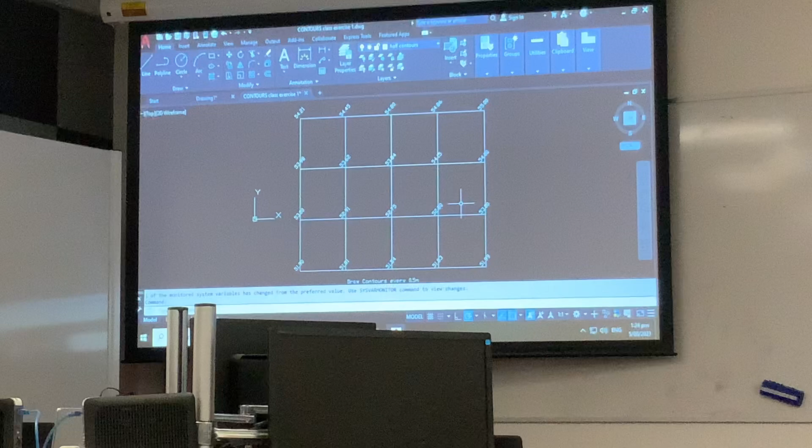With this exercise that's following on from my lecture on Wednesday, I'd like you to do contours - what does it say down the bottom - every half a metre. Okay, so looking at it...

Can anyone see a good place to start? There's a 53, and there's also a 54 over there as well.

Okay, so obviously you haven't been talking to the previous class, because the previous class was offered a half a mark for the best place to start from.

And obviously you guys have forgotten everything from last semester, because the golden rule of AutoCAD before you start is to make a layer. Okay, so we always start by making a layer. So let's make a layer up.

Yeah, there were 2 or 3 students in the last class who weren't very happy with my way around that one. So I'm going to make a layer up and call it contours. Don't worry, I've got a few more of those tricks up my sleeve - wait till next week.

So I'm going to get you started, and guess what, I'm going to make you do a bit of work after that. So it's probably a good idea to just put this on here, take off all these settings, whatever they're on at the moment, and just put nearest on. That way it doesn't bounce to different parts.

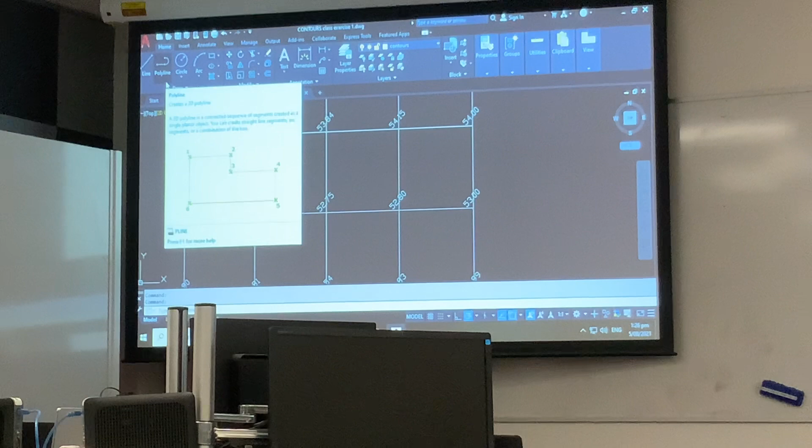Now remember, this is eyeballing - guesstimate, I call it. So it's best to do a P-line, and basically 53 is the next best.

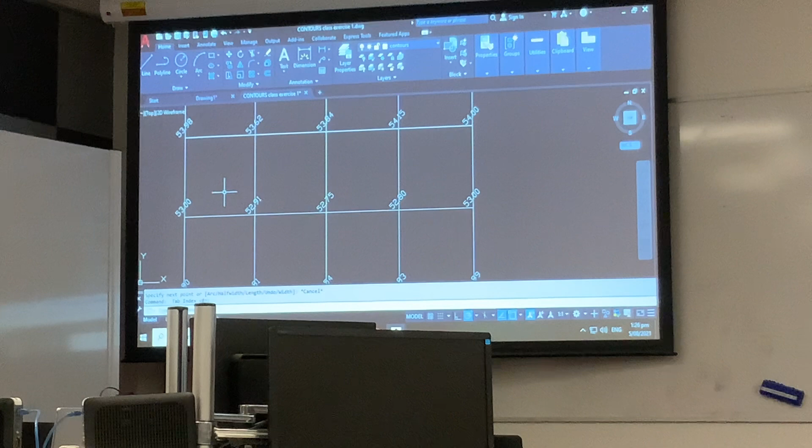Now see that stuff that's following me around? I call that bubble and squeak because I hate it - it follows you around all the time. I don't know what Ingrid told you to do, but I always change my snap settings down here to dynamic input and get rid of that lot. I see so many students that have that bubble and squeak going on, and they're trying to ask me a question, and these numbers are popping up all over the place, and I'm like, whoa, stop, get rid of that.

Okay, so a little tip there. P-line, shortcut PL, enter, or if you've got AutoCAD Classic already set, you can click on it as well. Notice the standard setting does have a polyline up in the top corner, beg your pardon. So I'm going to click there.

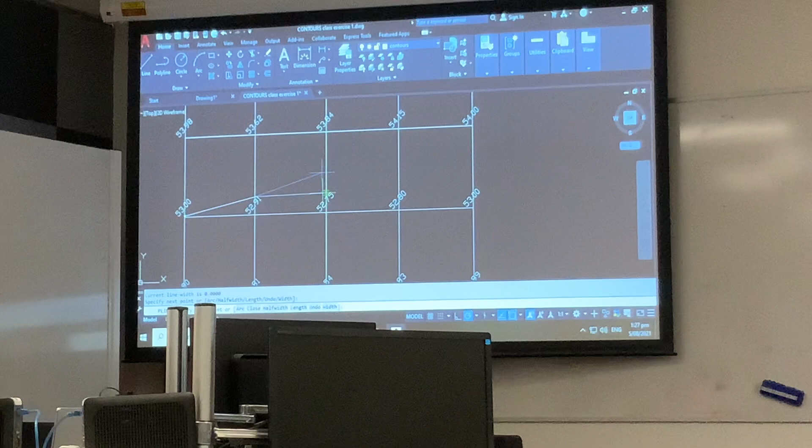I'm now going to estimate between here and here. 53 is real close to 52.91, and it's a long way from 53.62, so it's probably somewhere around about there. Looking between these two, well it's definitely not going to be between these two or those two, so it's probably going to be somewhere around about there - a bit closer to the 80. Notice that one's 54, not 53, so it's probably closer down here, and then back to the 53 over there.

All right, so that was fairly painless. What I'd like you to do is do the guesstimate yourself. I'll give you 3 minutes, 4 minutes - we'll make it 5 minutes, and then I'll draw it in 3 seconds. How's that, good deal? Have a go.

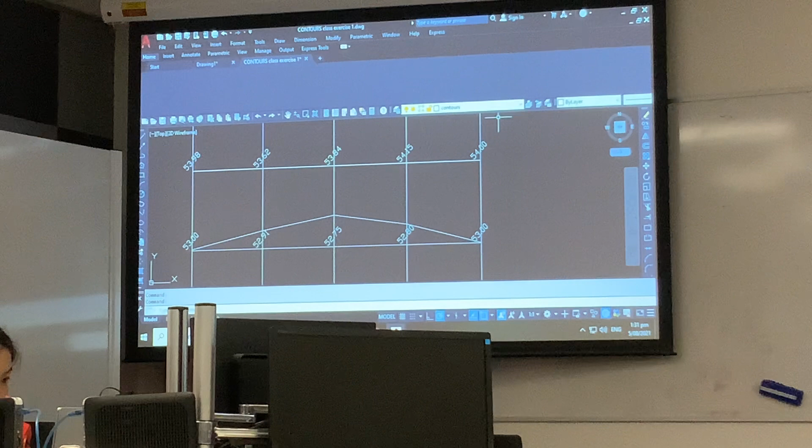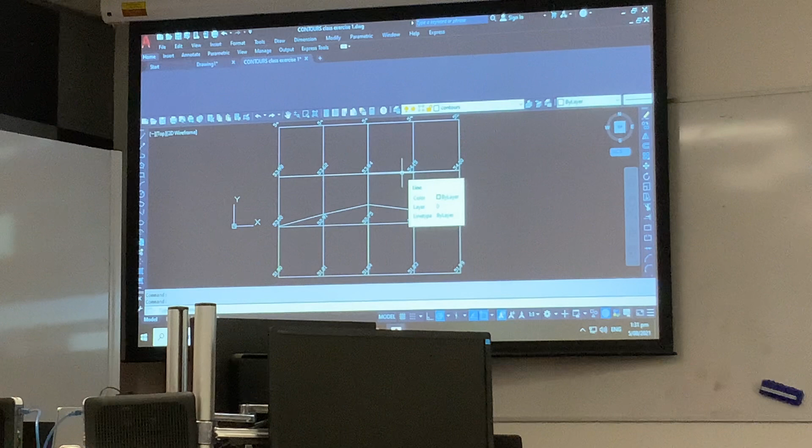So you'd start at 54, but it's a little bit different - you're going to have to guesstimate it coming through here somewhere. Then it goes back up here somewhere, and then it's going to go up here, and then there, and then up here. So the 54 line does a little bit of a strange thing like that.

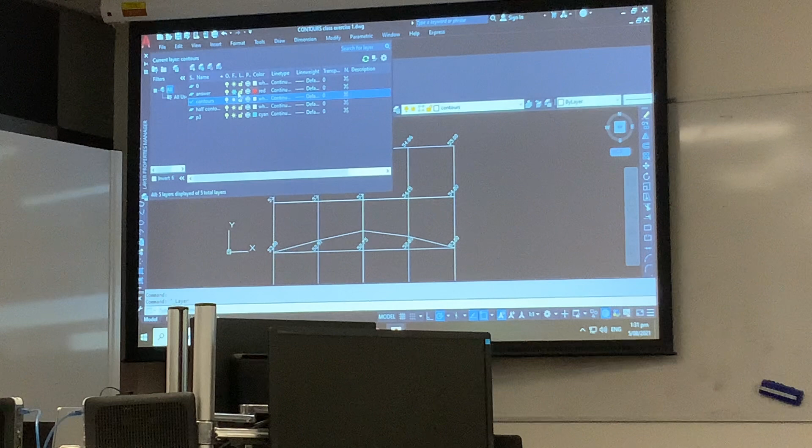But I did say that I would draw this up in 3 seconds, didn't I? Which was a bit of a smart thing to say, but what I forgot to tell you was I've already pre-drawn it. So when we go to our layer management and turn on the answer, you'll find it is there, okay? And let's have a look at what I've done - I'm not quite right, but it was pretty good for a guesstimate, all right?

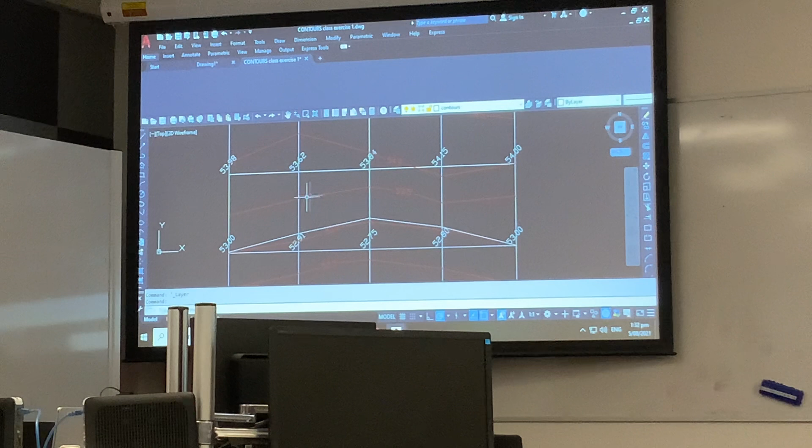So what I did was I drew the 53, then the 54, and then I put the 53.5 in the middle of the two. So that's the last of our guesstimate. You can see that you can still do a pretty good job of your contours, guesstimating, right?

And for a lot of site engineers, that's perfect. That's all they really want to do, to give them an idea of what they're trying to build. Let's face it, nothing in a civil engineering site is going to be 100% perfect. There's always a little bit of tolerance on what you're doing.

Structural's different. If structural engineering's your passion, you know, let's take steel beams meeting steel columns, and you're bolting a plate on somewhere, and you've got a hole that big to put the bolts through. It's got to match. It's no use being 10 mils out because you're not going to get the bolt through, are you? So structural's very, very different. We do that a lot more precisely.

And I'll be giving you some details on structural bolting and that sort of thing, in terms of working out the holes for things, etc. But in civil it's a little bit different.

So as a civil site engineer, you're going to have to do a lot of this type of stuff manually. It's doubtful if you'll have 12D, and it's even more doubtful if you'll have a copy of AutoCAD. You're more likely going to get a PDF file sent to site, which you'll print on a funny old printer that's there. You usually got the worst printer on the site, because they don't want it getting all dusty and dirty.

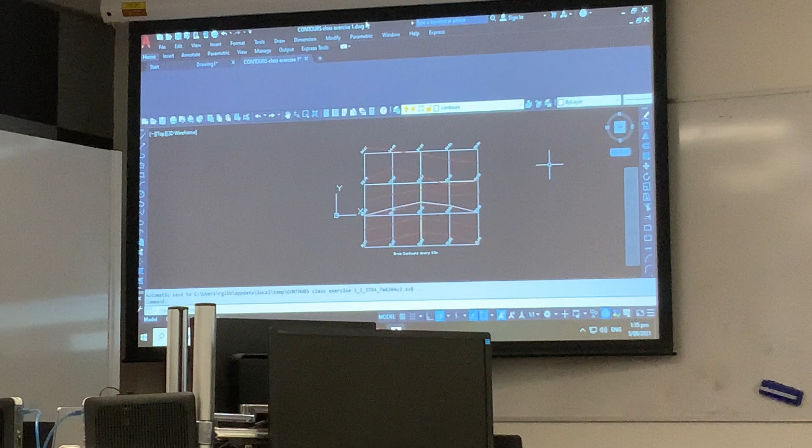So what I'm going to do is I'm going to do a typical design here, a fairly easy one, and then I'm going to throw you loose on an AutoCAD file with some contours on it and a platform, and give you a chance to have a go at doing it yourself.

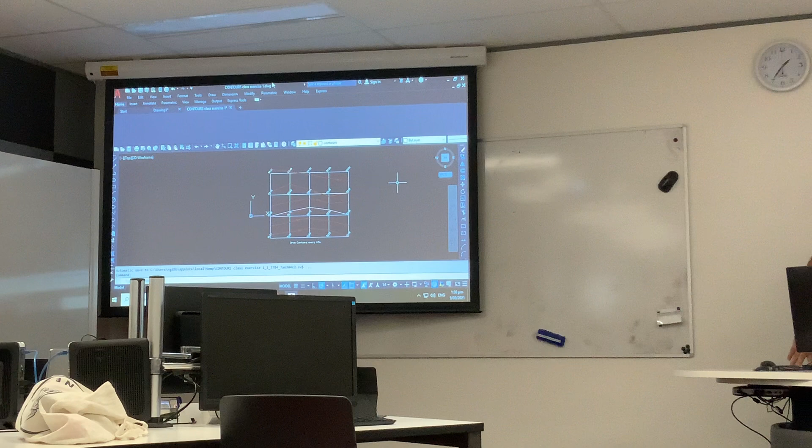But of course, like everything else in engineering, I should have been a baseball player because I love throwing curveballs. Okay, we're going to throw a curveball at you as well. Then I will show you the answer, both in AutoCAD format as well as a 3D file that I've made up to try and give you a bit of an idea of what's going on, so you can spin it around and have a look at it, not just in plan view.

You're going to have to do platform design for your assignment. So I'm looking at the camera right now. This is 6 or 7 marks that I am not going to give you any help with, and neither will the past students. But because this is being filmed, you'll get a very good idea of the type of things that need to be on the drawing.

All right? It's assignment 2, so a lot of you go, oh, not worried about that, that's 5 or 6 weeks away. It will come pretty quickly, and you'll be racing back to have a look at that movie file to see what I've put on the board, okay?

So it's not like I'm not giving you the answer, it's just that when students email me saying, shall I put the word cut on the cut area, I'll say, I'm sorry, I'm not giving you any help with that side of it. But you'll notice tonight I will put the word cut in the cut area, all right?

So, Douglas, you should really be putting this file somewhere where you can charge for people to go on the site.

Because most of the students I'm noticing are not note takers anymore. COVID's killed your note taking ability. You sit there and you go, oh, I'll watch the video later on. Once again, the video's on an angle, it may be a little bit difficult to see the board, so you will have to listen to what I'm saying. I'm loath to do this, but I'm going to go and turn that off.

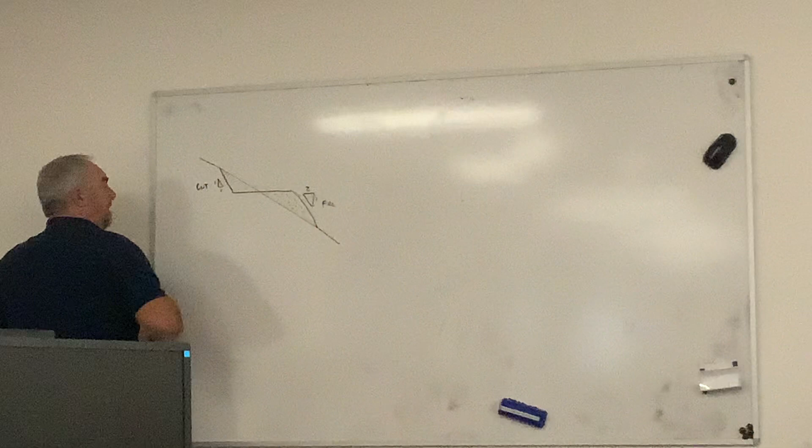Now obviously, to save money and time, you're not going to make the cut 2 to 1, or else you'll end up cutting more of the bank, so you keep that cut to the minimum. Therefore it's very difficult to balance cut and fill in Auckland.

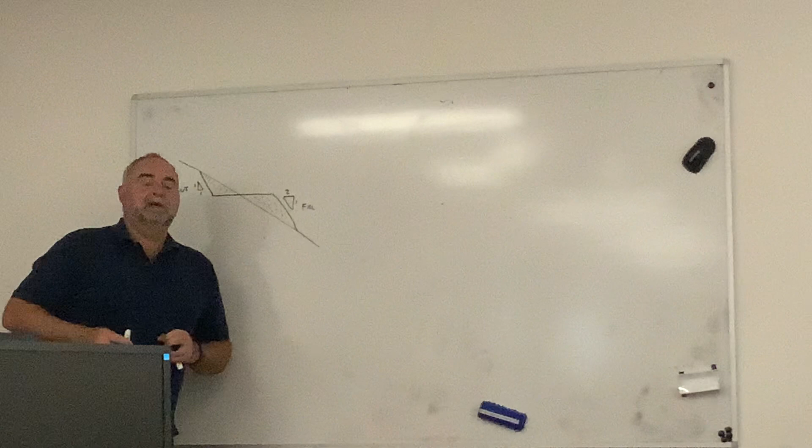Generally, you end up with more fill than cut, which unfortunately means bringing in, for most sites, clean engineering fill from a quarry. There are only certain places you can get it around Auckland, and we all know what the traffic's like - send a truck away at 1 o'clock to get some clean fill, and they come back at 5.

The building industry, everybody's got the same issue, so the truck driver's not going to lose money, so he puts his costs up. Everything costs money. The best design is when cut equals fill, then you're just manoeuvring it around on the side, or you find somewhere on the site to put it.

Generally, environmental engineers don't get too upset if the material you're digging out of the site is kept on the site, because you're not bringing anything in from another part. Where they get upset is when you bring fill that's not clean engineering fill, and it's come from some site down the road where no one knows if it's full of garbage, trash, contaminated stuff, whatever. That's not good - it can also flow down into the streams and water.

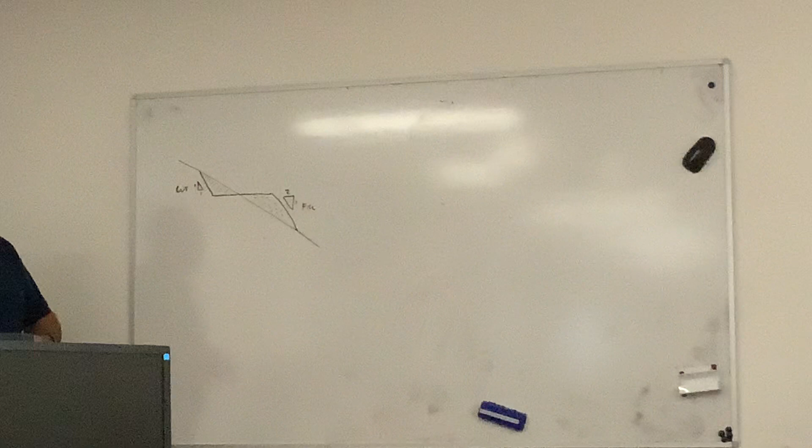These numbers here are determined by the geotechnical engineer, which I might have mentioned in the first lecture. Normally not a designer's best friend, because they tend to change these numbers, and even a little change means whatever you've worked out is going to be completely different again.

It's worse on a road - a platform's kind of limited, but on a road you might be going over 10 kilometres, and if they change these numbers on your batter slopes, your cut and fill balance just goes haywire. So you have to raise or lower the road to try and balance it, which messes up your vertical curves. You can get away with putting a different horizontal curve to make the road longer in an area of cut or fill to balance it out.

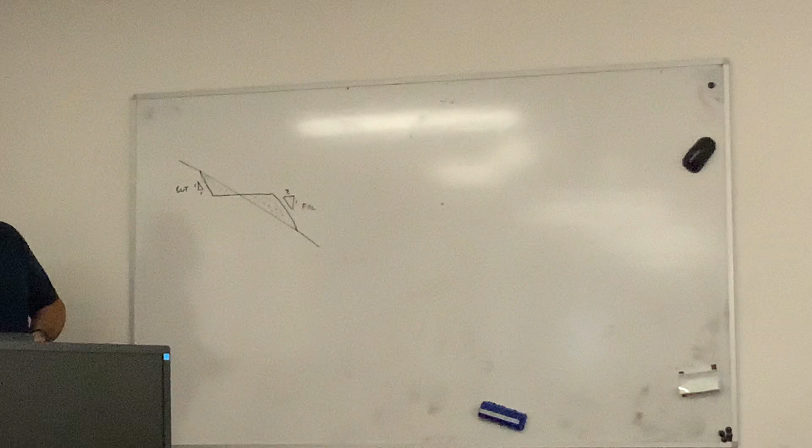There are ways around it, but the last thing you want is changing your design a day before it goes out the door - you might have 50 sheets of sections and 10 sheets of long sections, and you've got to redo them all just because this guy's changed the slope to 1.5 to 1 or 2.5 to 1 or something like that.

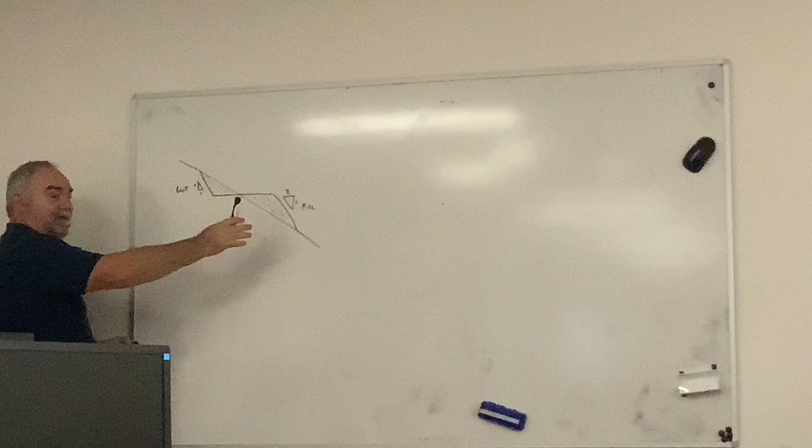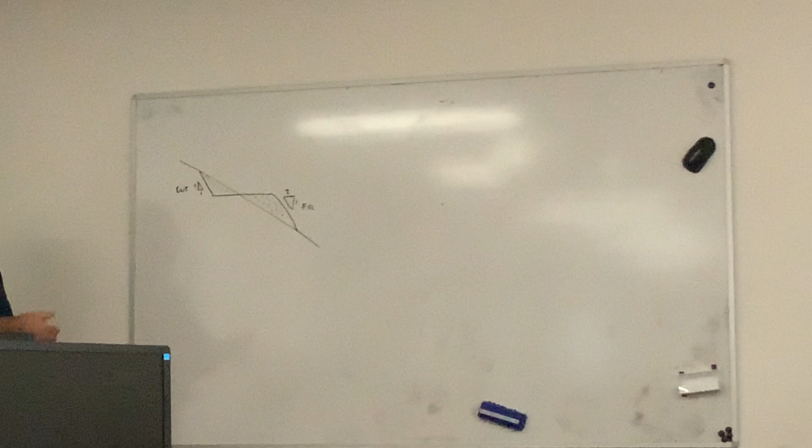So I've tried over the times to buddy up to them and say, hey, a week before, is that final? Oh yeah, it should be all right. Then the day before, oh I'm doing this because most of them have got a worse beard than me, covered in clay and mud because that's what they do, they drill holes and look at soil all day. They'll just come up the day before and say, sorry, I've changed my mind, and usually sorry doesn't come into it, it'll be 2.5 to 1.

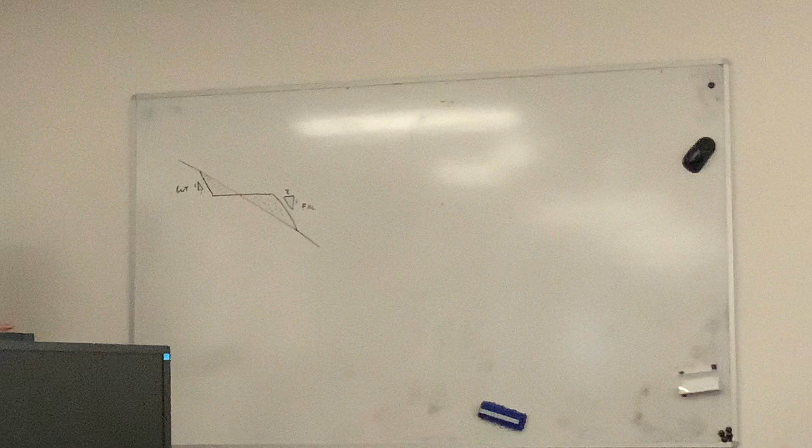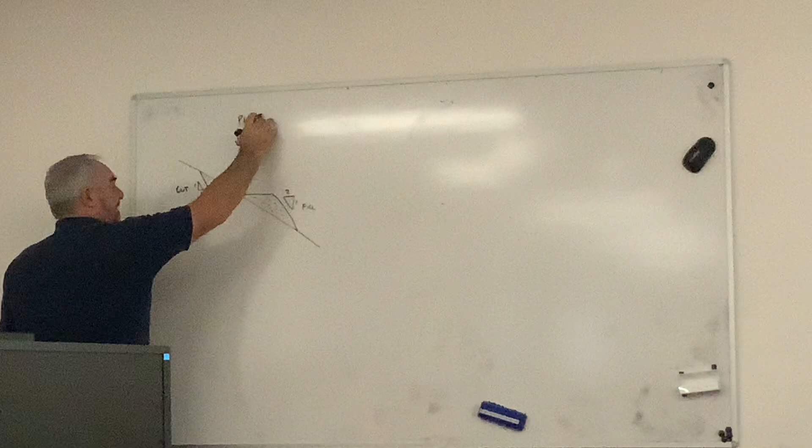But getting back to what you're doing, this here is design, and this is what we have to do, show in plan view looking down on it. So looking down on our platform here, we have the platform shape, which is easy to do, that's not a problem.

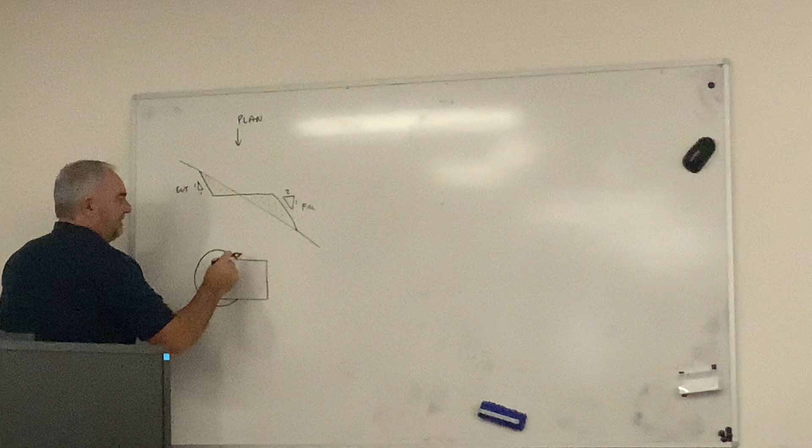Where this meets here and on the other side will be the area of cut, and you'll find that the area of fill, because this is normally drawn like this, ends up being quite a bit bigger, so the area of fill can end up being as big as that. And you're starting to see what I mean by butterfly wings?

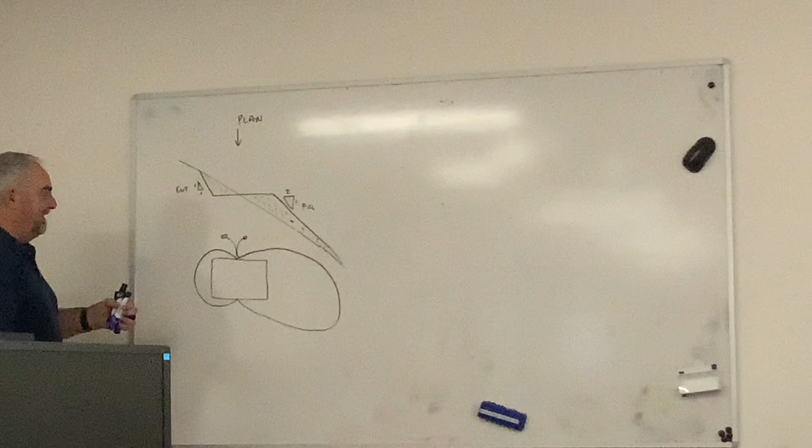All right, this one's flying into the sun, so it's like this. Yeah, it's a bit weird because I've taught 2,500 students over the years, and they all refer to that as butterfly wings, which is totally not an engineering term.

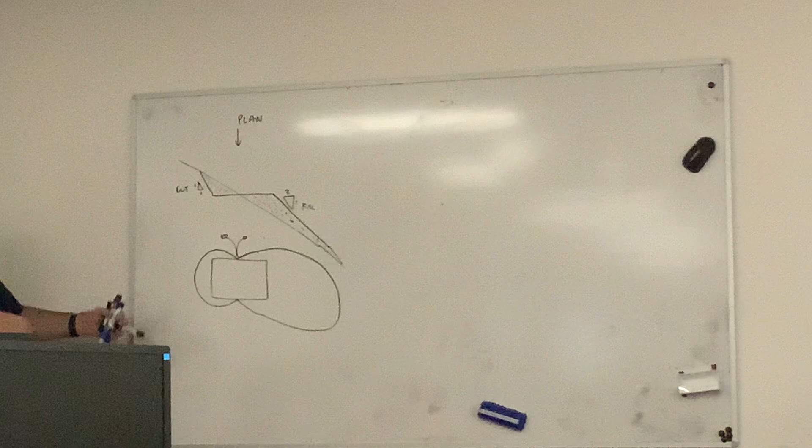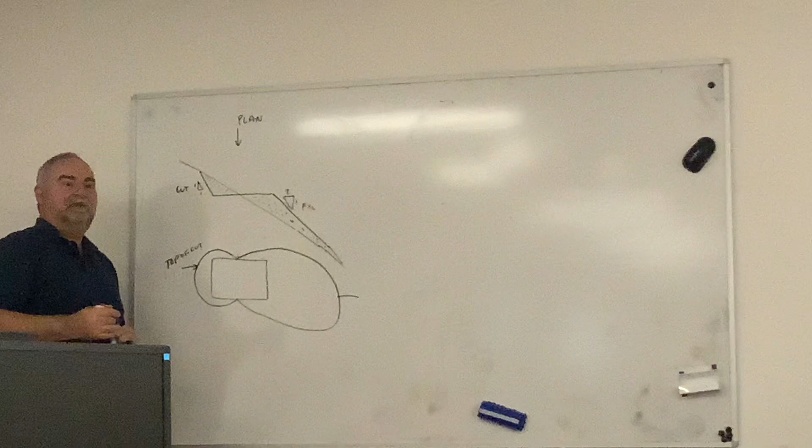They are actually called top of cut, and anyone know what that one's called? Bottom of the fill. Who said that first? Congratulations, you're not getting half a mark. They're called the toe of the fill.

It's all right, you get a chance in about week 8, sequel. Roger Gibb, horrible lecturer, does not give out half marks very easily. Yeah, the toe of the fill.

Now, most of you have done 4 subjects here at Unitec in semester 1, 1 or 2 have done a few more. If you've done the likes of Geology 1, where there's a slip in geology, they refer to the bottom of the slip as the toe of the slip. So in engineering, we refer to anything at the bottom as the toe - you'll always remember that, won't you? It's one of my questions in the test. You'll be the only one that gets that right.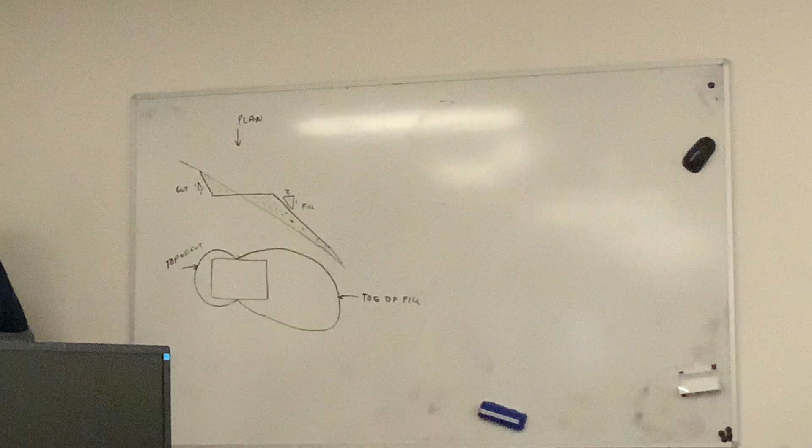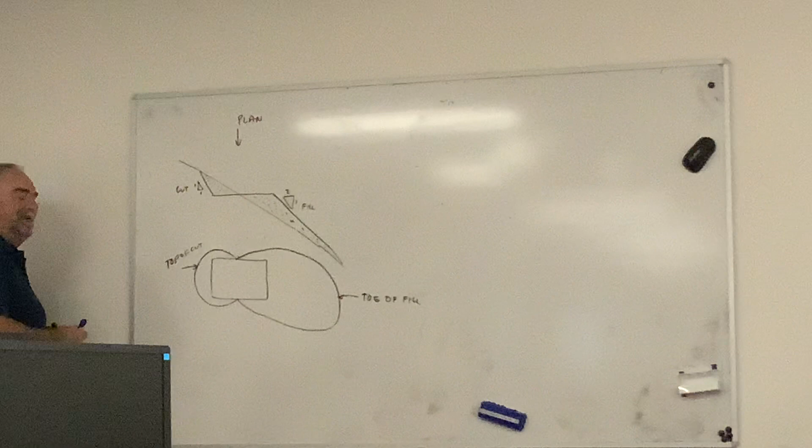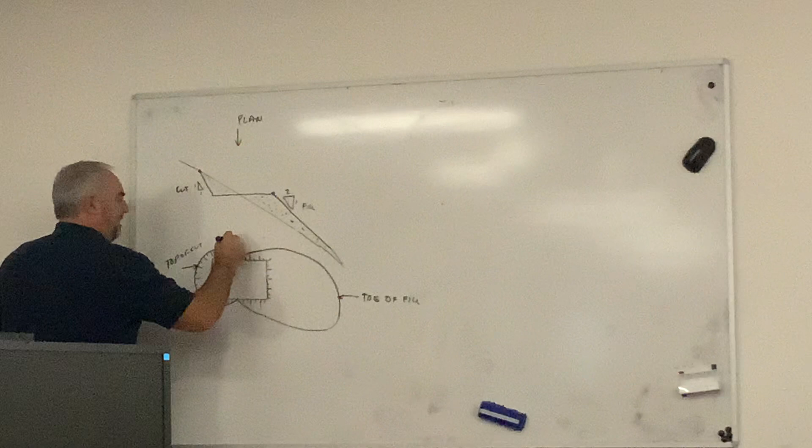So they have a name, so don't call them butterfly wings just yet - wait till you get into industry and see the reaction of your boss. Also, we need to see which way, when looking at a plan view, it's sloping. So we always put these little batter slope things, which I introduced last week. They look something like this, and we always put them at the top of the slope - one there, and one there going downwards. A lot of students put them in the wrong place. Always at the top. These are called, for want of a better word, batter slope symbols.

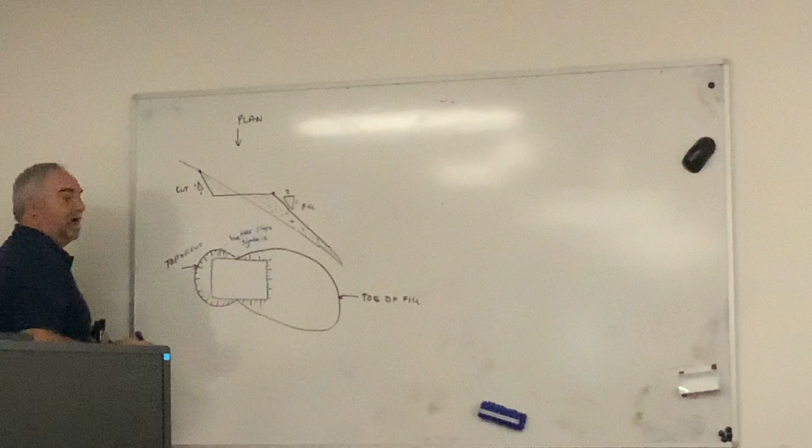Now, you won't need to put them on your existing site plan because that's an existing site plan, but you will need to put that as a little extra on your legend of your assignment 2.

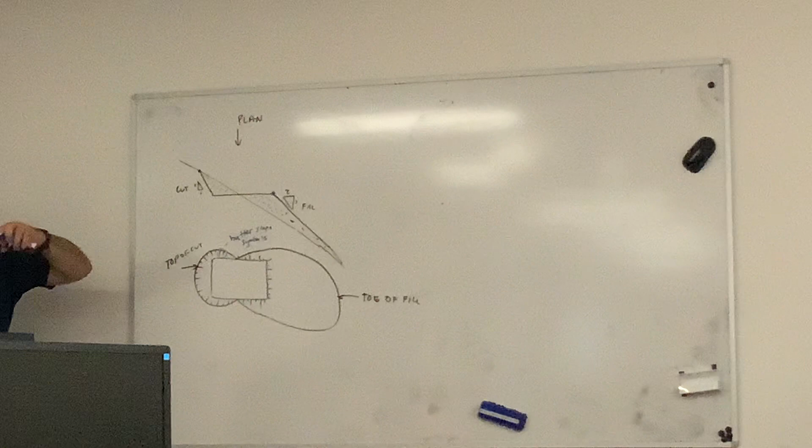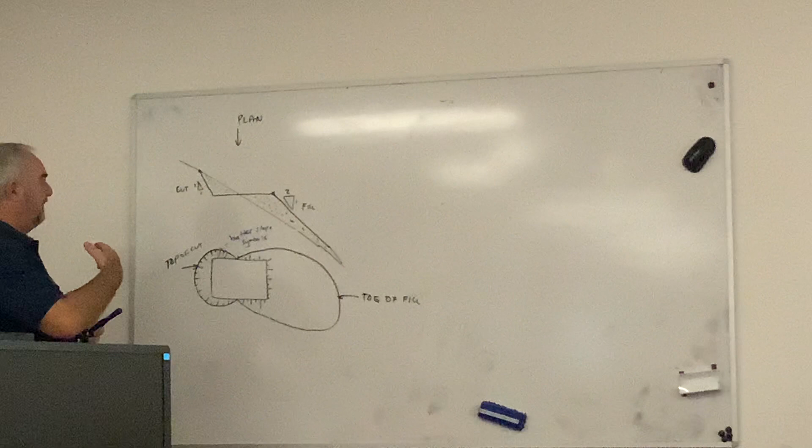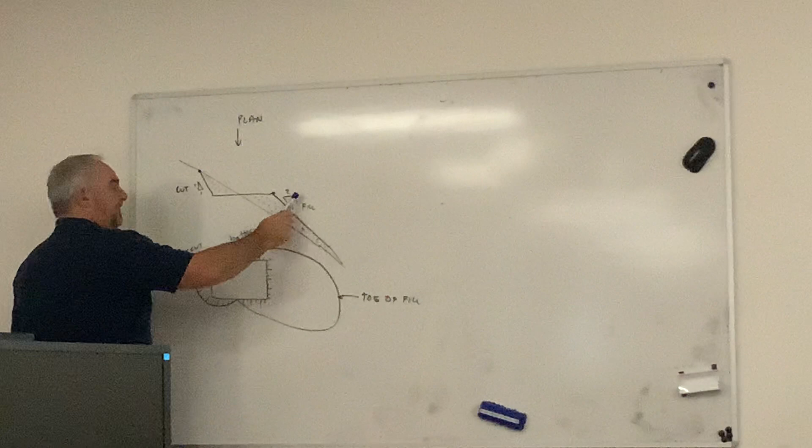Okay, so that's the basic principle of what I'm about to design on the other side here. What is the tricky bit is working out how much in horizontal we go for every vertical that we go up 1 meter. And I'm using some pretty easy numbers - believe me, it gets more difficult when it's the likes of 2.3 to 1.1 or something like that, okay?

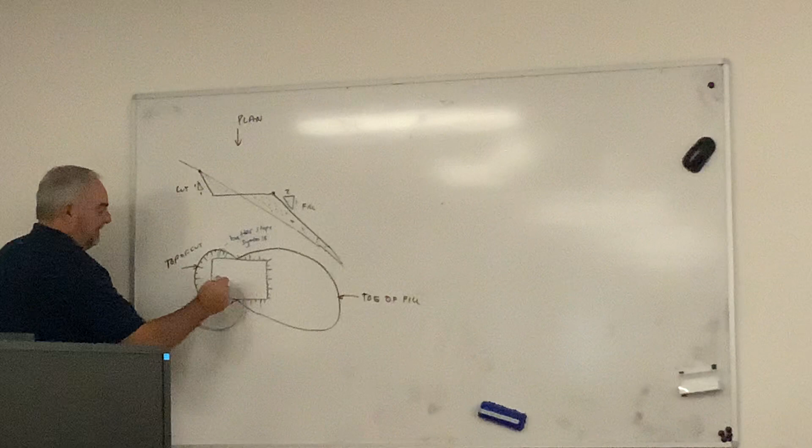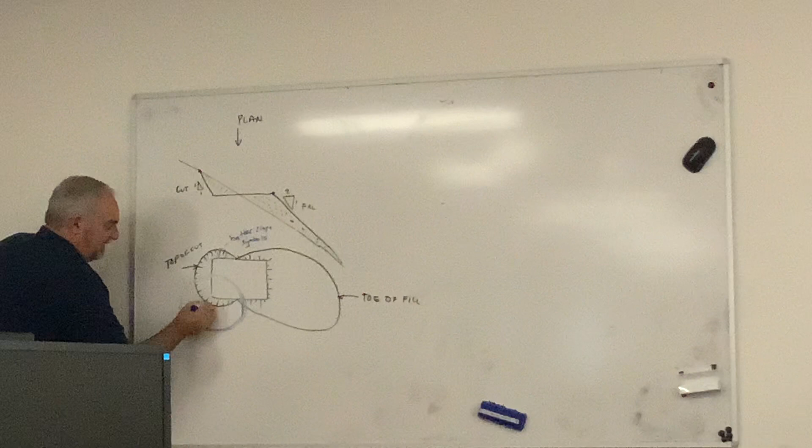So I'm going to design, I'm going to show you how we do something like that area there. So there's a wee bit of cut and a little bit of fill. More precisely, I'm going to show you how we find this line here - this line is where all your engineering work hits the existing ground, right? So that point there as it goes around in plan view.

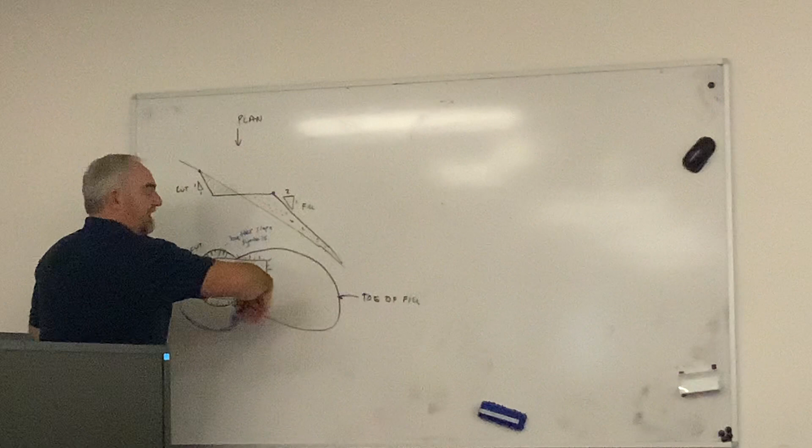So let's do an example of a platform, and let's call this 20.0 as the platform level, okay? And let's do some contours through it.

I'm just hanging out here with my contours, mates. There's 20, 21, 22, 23, might even do a 24. We'll put the numbers here: 24, 23, 22, 21, 20, 19, 18, 17, right?

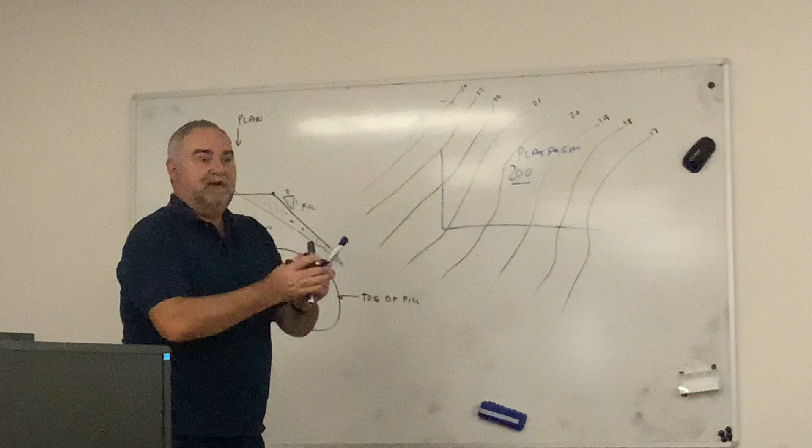The next step is to, well, you'll be in AutoCAD, so you know how much a metre is, how much 2 metres is, how much 3 is. To demonstrate this, I'll do what you're going to be doing on your locality plan. So let's just put a little scale bar on here: 0, 1, 2, 3, 4, 5, etc.

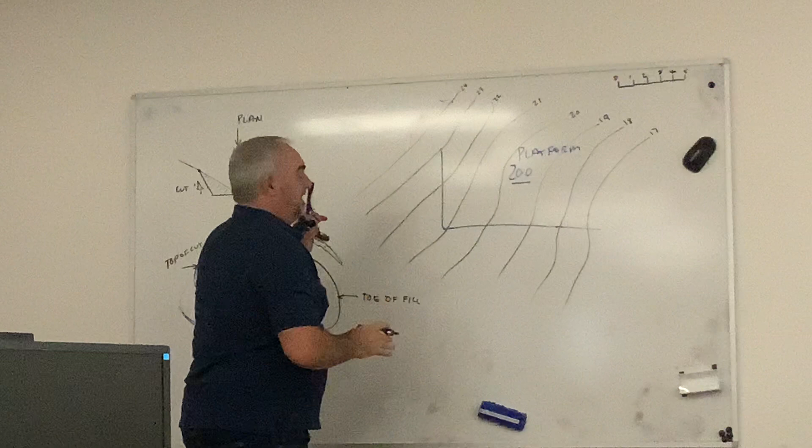The first thing to identify on any platform design is the area that is cut and the area that is filled. The simplest way to do it is to look at these numbers and look at that number. These numbers are higher, so it's the cut - as simple as that. These numbers down here are lower, so this area is going to be the fill. Very important to identify that.

I have no problem with you leaving cut and fill on your design platform. I think it's a very good idea, don't have a problem with that. You can call it fill area or cut area, or just leave it in that particular side. So let's do the cut first, because the cut's easy. It's 1 to 1.

That means that for every time we go this way 1, we go up 1, this way 1, up 1, this way 1, up 1. So looking down is very simple. We're offsetting from the platform 1. So let's offset from the platform 1. We'll do that in blue. Here's 1, there, there.

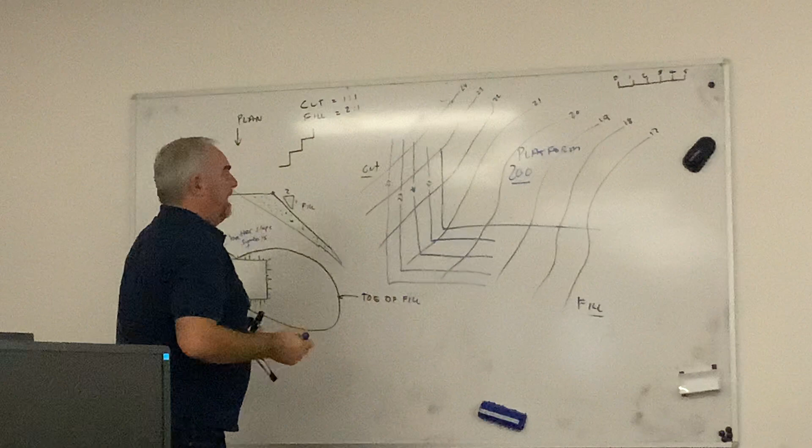We only need to do it on the cut side. I better put some numbers beside these. So that will be going uphill: 21, 22, 23, and 24. And now we go, where the 21 hits the 21, which is there, we put a cross. Where the 22 hits the 22, another cross, 23 and 24.

We join up those crosses, and that is our - you've forgotten already - top of cut. Top of cut.

But now, for those that try to do this on your assignment, this is really important. I'm looking at the camera. You can't cut through that line to go to that point. You must go around here to get to that point, all right? You must stay between those two lines there. Otherwise, you're cutting through the 21, then going back to the 21.

And now the last point is going to be this point here, which is equal to the 20 contour going through the platform, because technically there's no cut or fill at that point. So we'll go around and we'll go to the other.

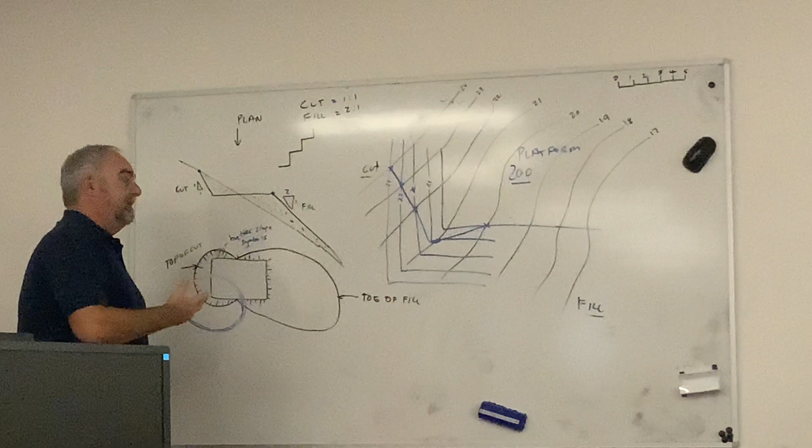Now a lot of students just do that and they think they hand it in and they go, whoopee, Roger's going to give me a good mark, I've done it, I've done the calcs, done the hard work. Whereas you might as well put that on your grandmother's fridge magnet because it's not a proper design drawing. It's just a whole lot of lines everywhere, right? You've got to tidy that up.

So what I expect you to do is change that line from there to there to a layer called Contour 21 Delete. And I don't want to see it - I want you to freeze it. So that'll go. We'll, just for the record, put him out here and put 21, 22 out here. 23, you'll see why in a minute. 24.

This one will stop at that point there where it hits the ground. This one will stop at that point there where it hits, and that one will stop where it hits. Now, these design contours are the same. We don't need them over there, and we don't need them outside of the batter, so that 23 is going to have to go inside, and the 24 is going to have to go there as well, because that will disappear.

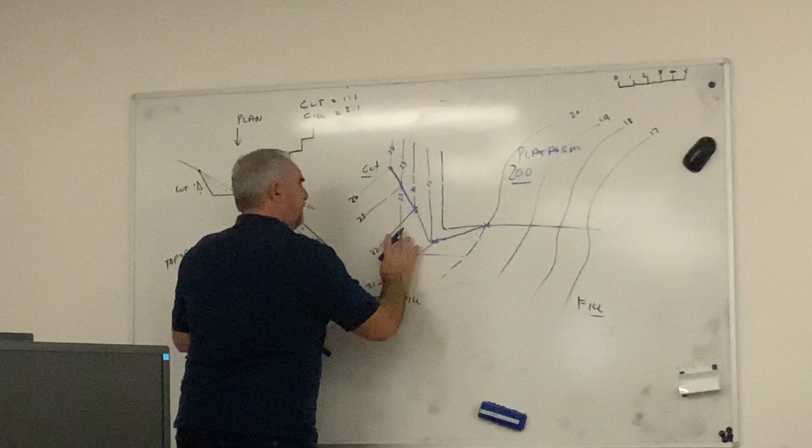Gone. I always go home after this class with lots and lots of ink all over me. Go and touch something I'm not supposed to touch. Okay, so there we are.

That's what that will look like. This is only this little bit going around here. This will carry on - of course, it'll go right around the platform to the other side, and then it'll hit over here somewhere. And what we need to do with this piece here is make up a line type, like 2 dashes and 2 wee ones, or 2 wee ones and a big dash, or something like that. This is called our line of equal cut and fill.

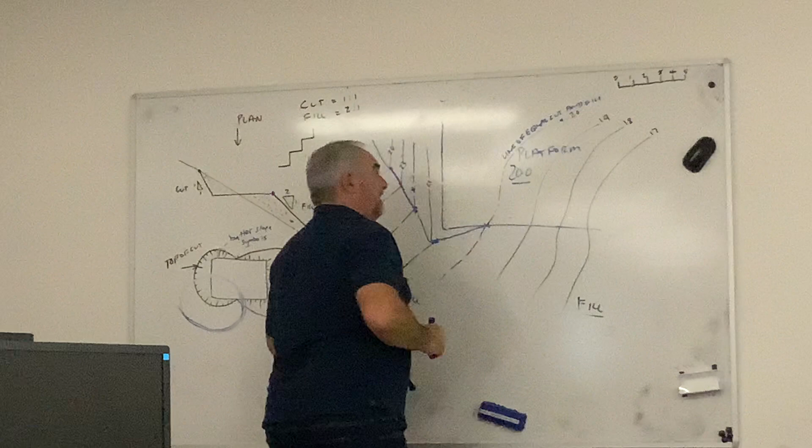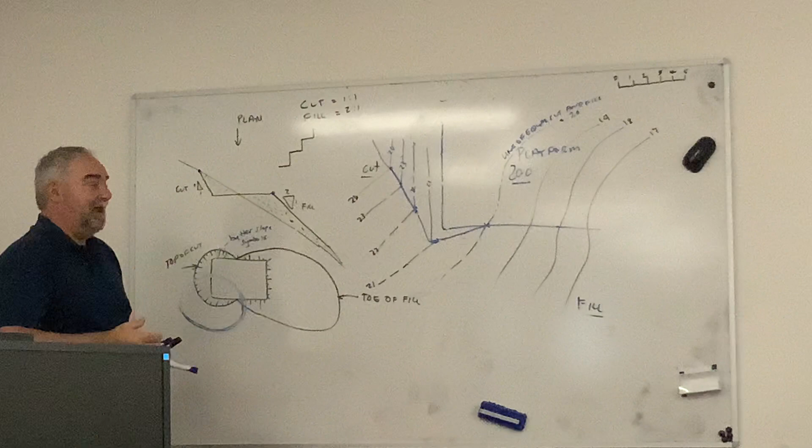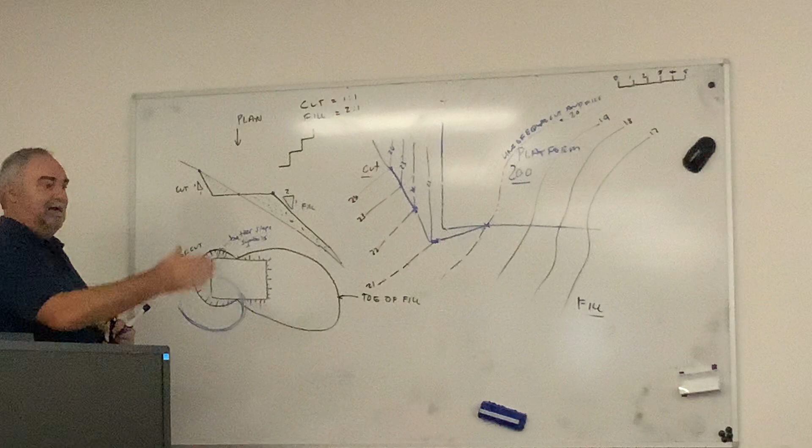So on this job here, it represents that point. And when the surveyors set it out, they generally put a peg on that point, because the digger should not touch it. They should not take any dirt away or clay away. They should not put any clay where that peg is, because it should be basically almost the exact ground left there.

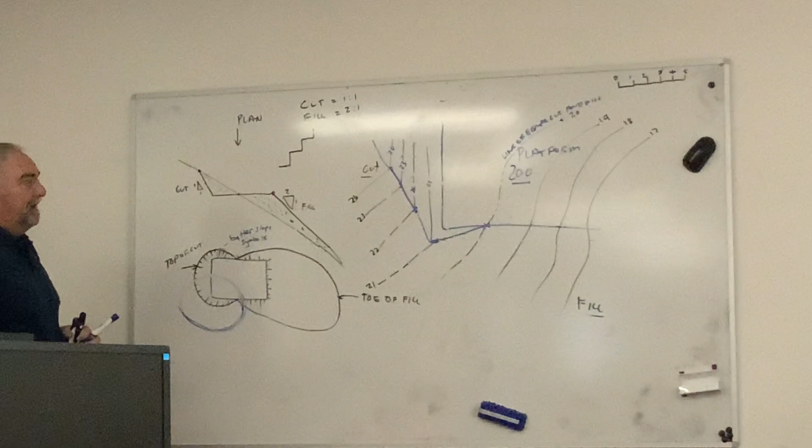It's best to keep the contours on a layer, so you have to split - one would be frozen, and one normal. So you might have to call it contour layer freeze and contour layer normal, or 21 or 18 or 17 or whatever. So the only one that you would do would be this one, which you would change to the line of equal cut and fill.

That's okay, as long as it's a logical name—not layer 1, layer 2, layer 3, all right? You've got that from last semester.

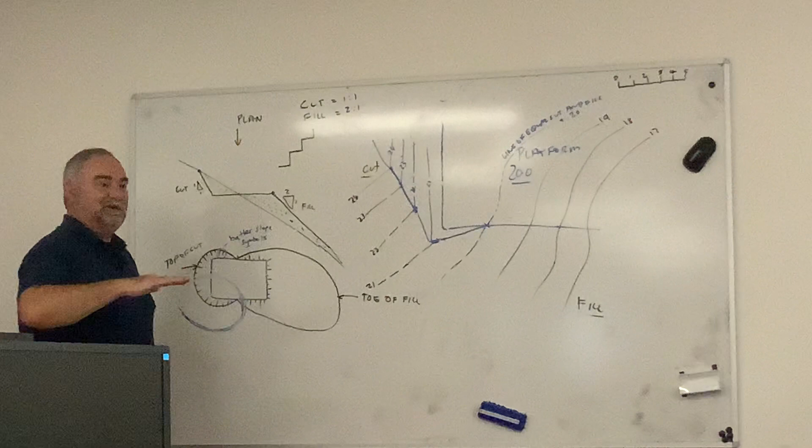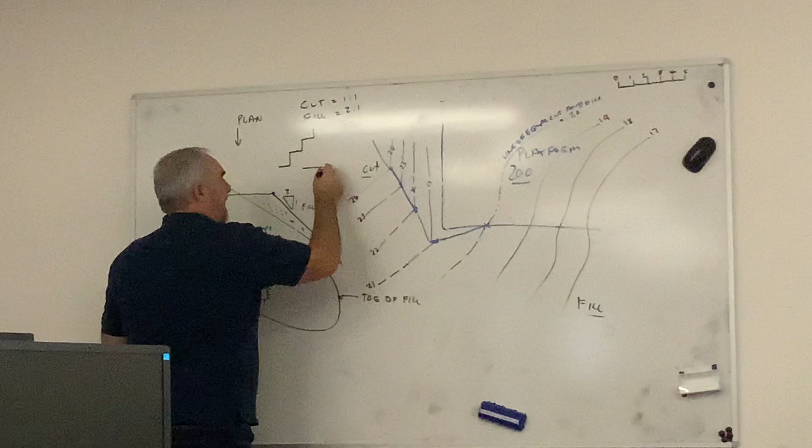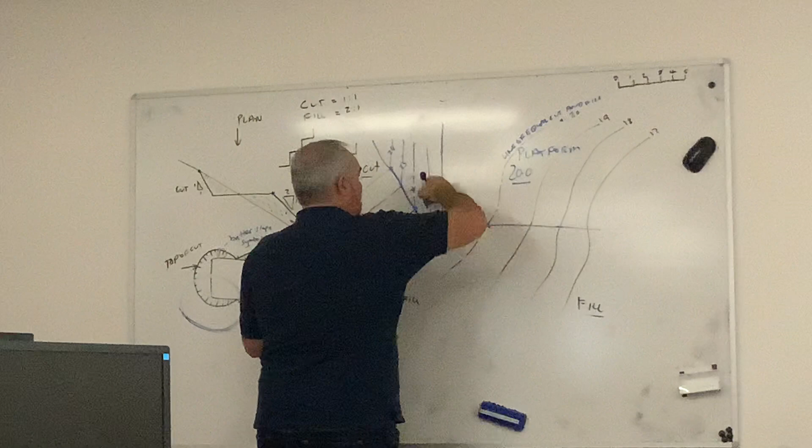So how do we do the fill? Well, when you're looking at fill, it's a bit different. We go along 2, up 1, along 2, up 1, along 2, up 1. So this time we're going to go off by 2 instead of 1, which is about that.

And of course, this is going to be 19, 18, and 17.

Yeah, along 2, down 1, 2, 1, 2, 1. So putting the crosses in.

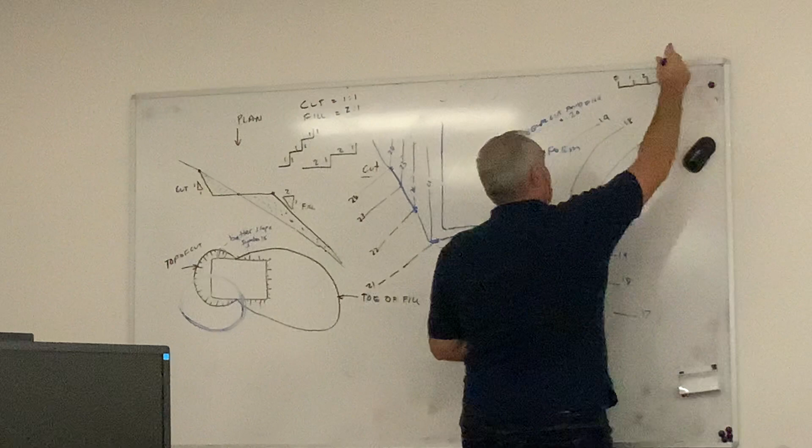So that would be the big side of the butterfly wing that would go right round and also end up back here. I'd love to show you exactly where it went, but I'd probably get in trouble with Unitec for drawing all over their walls. But you get the general idea of what's going on.

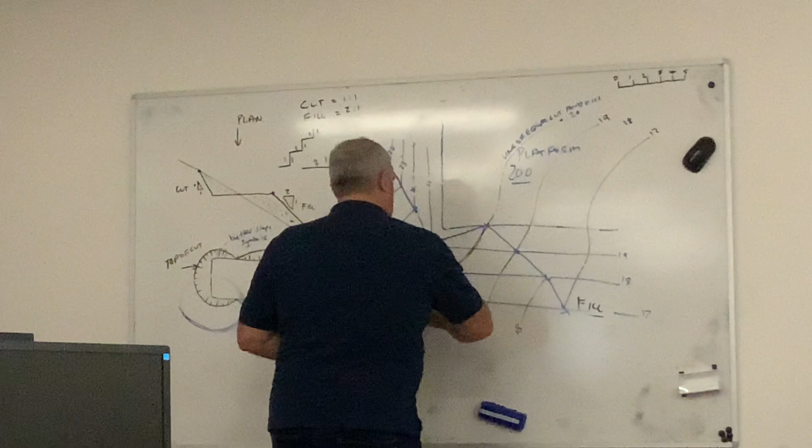Once again, this will disappear all the way down to that point there, and at that point, the 18 will be here, the 19 will be there, that will be up to there, that'll be the 20, and that'll be the 17. And these disappear as well.

And if you put contours on, is it okay to use the same layer as the contours that we've given, like survey, or do you want to—No, yeah, definitely put them on a different layer.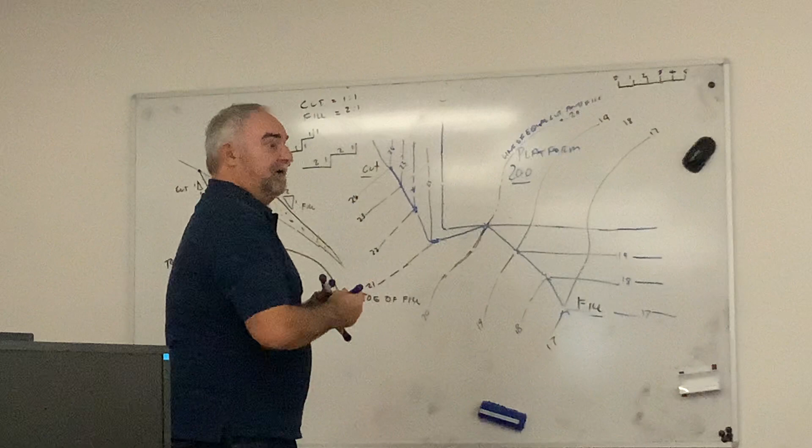These are called design contours or formation contours, either is correct. So for assignment 1, not assignment two—assignment 1 you won't have any formation contours on there at all.

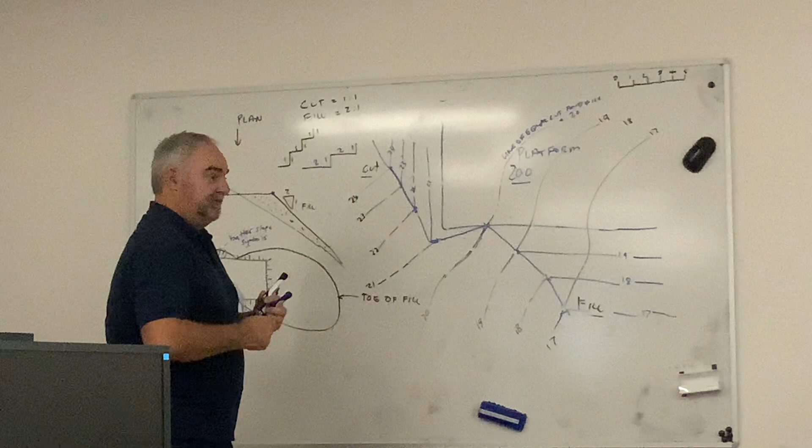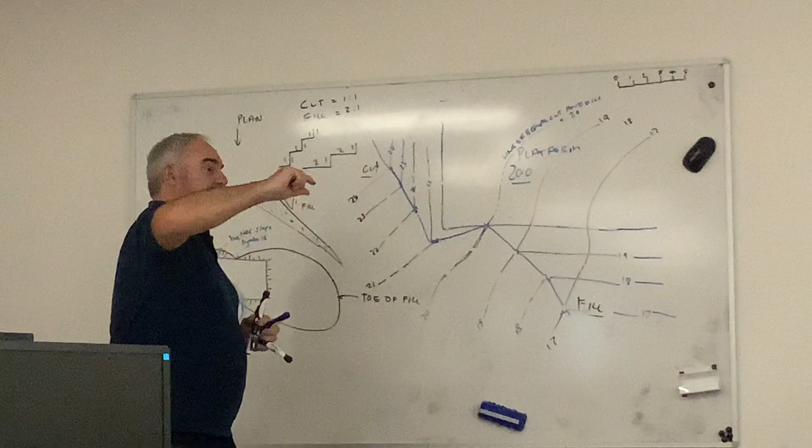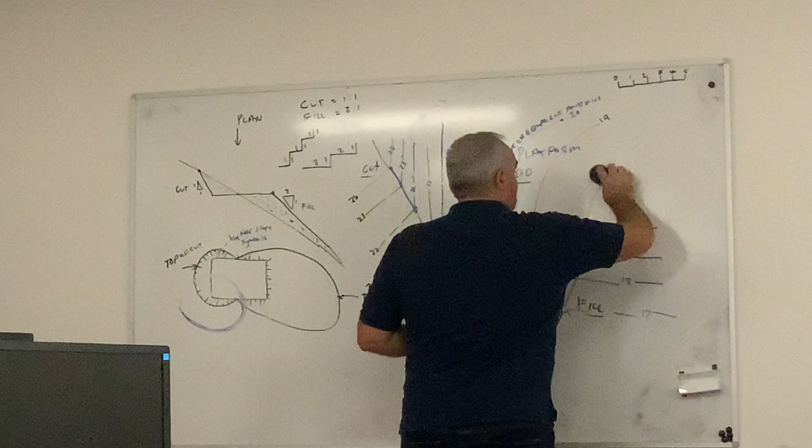Assignment 1 will just be—when we do our contours, you know how we would get spot levels and we put contours with them? Should we put them on the same layer as the other ones that I've got there? As long as it's a layer called contours, that's fine. Some students like to break it down to contour 20, contour 19, contour 18. That's fine as well, depends how much you want to break it down and how many layers you want to end up having.

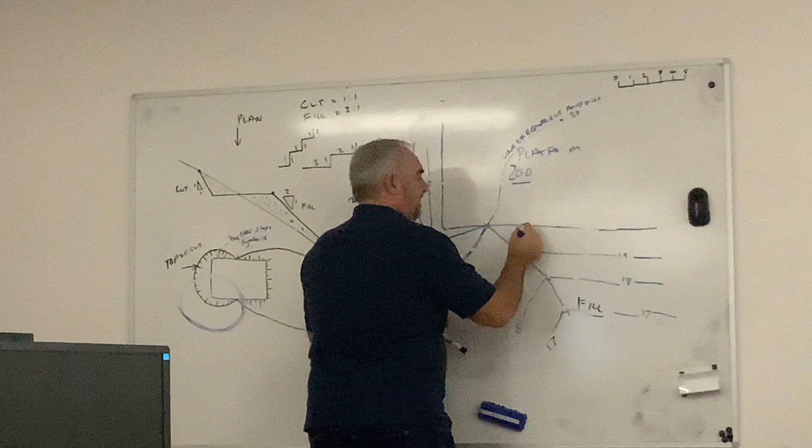I kind of feel that in most cases there's no harm in as many layers as you can, because from my experience, if you try to keep your layers to a minimum, you're going to get a client come in and say, oh, can I please have just the buildings, the paths, and I'd like those trees there but not those ones, and can you also send me the spot levels and everything else turned off? And you're like, whoa, I've actually put the path on the same layer as the building, and that tree's on the same layer as those trees over there. How am I going to do this?

Because normally you just turn them on and off on your layers and do a print, wouldn't you? So that is the power of AutoCAD, is turning those layers on and off and then doing a completely different drawing for another person. You do it real quick. So I've always said to my guys that have been doing the drawings, hey, the more layers the better, as long as they make sense.

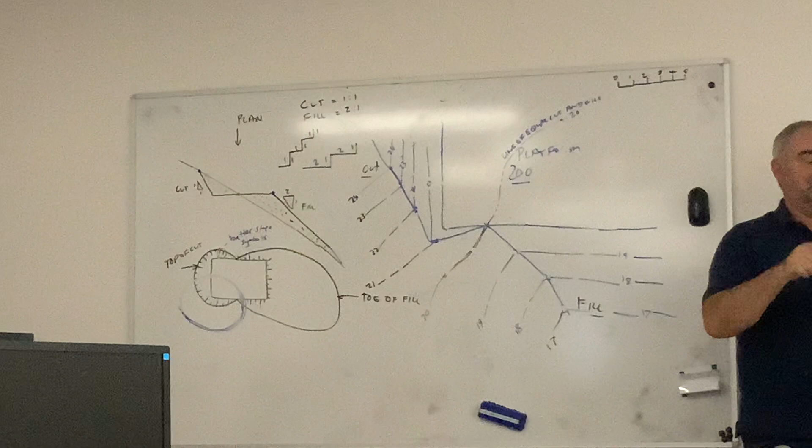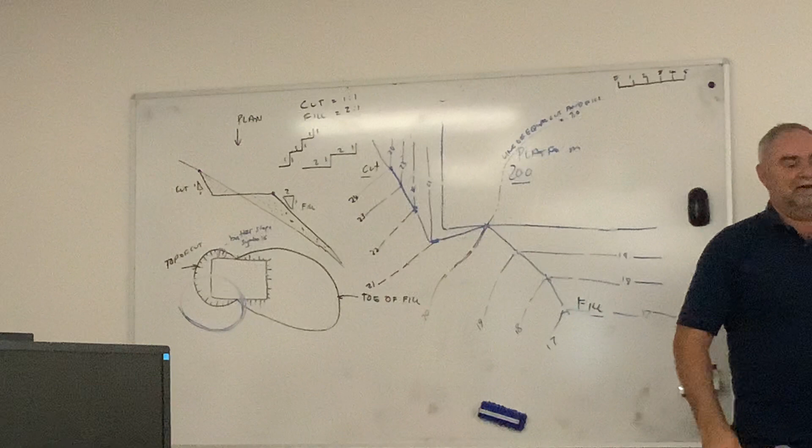It's a tricky world out there. The surveyors from office to office—some of them will come in and they'll say, guys, we're doing the survey for you, what are your layers? What do you want everything on?

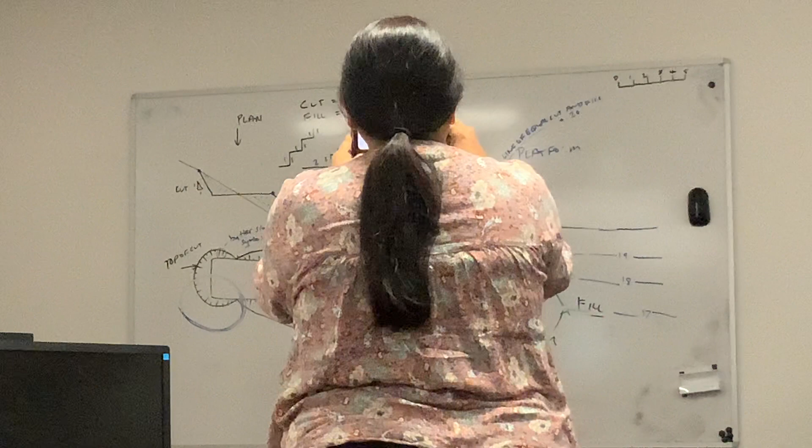Which is what it should be. And they'll come back and they'll produce a lovely drawing with all the layers ready for you to start work on. Others will just come back with random layers and they'll say that's the way we do it—you picked us for the cheapest survey. Now you're in trouble. And yeah, there's many a time we've spent a whole day fixing a survey up just to get it ready to do design drawings on.

So I said to you before, I'm going to throw a curveball, right? And it wouldn't be engineering without a curveball, really. Let's have a look at the next one in line. Let's have a look at number 2, which is, of course, turning these on and off all day.